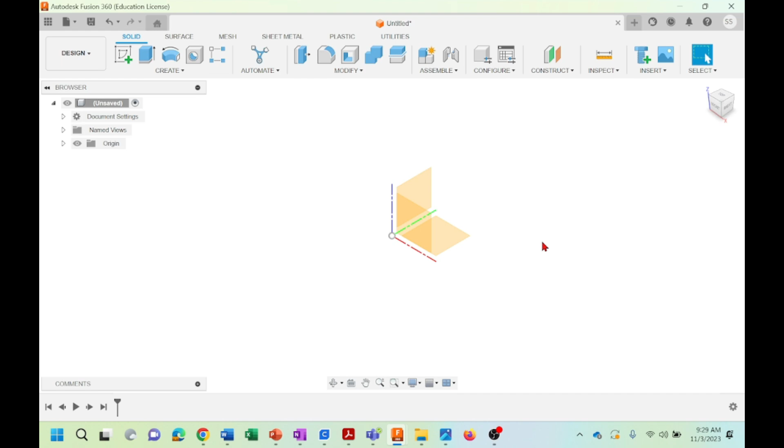So as you could see, we come here, we click on this eye icon to be able to see the origin. So as usual, you go home, and as you can see here, there are three axes. The red is the X, the Z is blue, and the Y is green. So I want to have the sketch in the XY plane. So I click on this plane here, right click and say create sketch.

So now I'm in the XY plane and I could have my two-dimensional sketch here. Before we start to draw anything, there is an important term in Fusion 360 that you need to understand: fully constrained. So what's the meaning of a fully constrained sketch? It means whenever you draw any item, if its size and position are completely defined for the software, we call that sketch or drawing fully constrained.

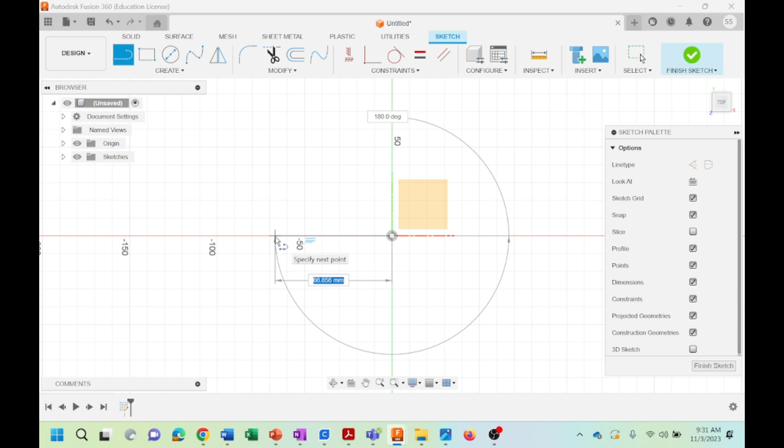So let's have one example and see what that means. Let's come to the XY plane and here you see Create. I select this line; I want to draw a line. So I put one point on the origin and the other one on the x-axis. You could type the length. Let's say 50 and we click that.

So as you could see here, I drew the line, its color is black, and you also see this small lock icon here. That means my drawing is fully constrained, and the software knows exactly what I drew here. As I said, if your drawing is fully constrained, the color should be black and you should also see this lock icon here.

So let's draw another line which is not fully constrained. I click here on the origin, another line, say 95 as the length and press enter. See this line. As you could see, the color is blue, which tells us it's not fully constrained, and also this lock symbol changed to a pencil, which is another sign that says this is not fully constrained.

In Fusion 360, the origin is defined, so whenever you put any dot there or start at that point, the software knows exactly where it is. The same goes for any point that you click on the Y and X axes; the software knows that point. So for this line, I clicked on the origin, which the software knows, and I chose a point on the x-axis, which again the software knows. That's why this is fully constrained.

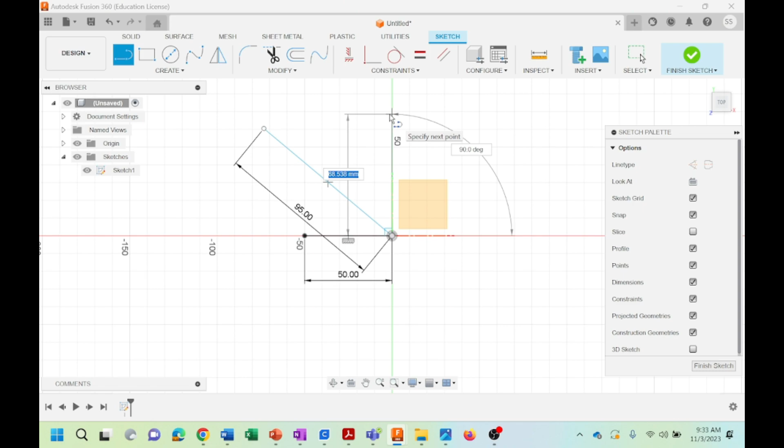So let's have another line. I click here on the origin, the other end should be on the y-axis, and I give 70. I click that. As you could see, it is black, which means it is fully constrained. And because we have this line which is not constrained, there is still this pencil.

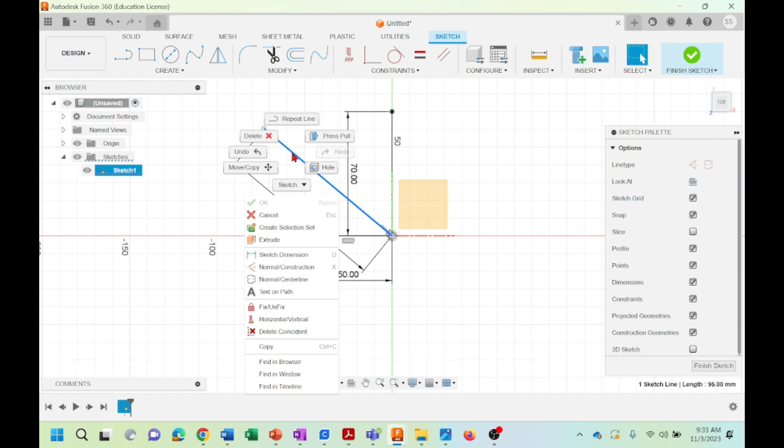If I delete this, just click on it, right click, and it should give you the option to delete. Now I delete it and see my sketch: the lock is back here because I have two lines which are both fully constrained. So that's what you should be careful about whenever you use it.

Whenever you draw a line, you see here you have a sketch palette. The first item has two options for line type. Line type could be construction or centerline. If it's construction, it means this is not a part of your drawing; construction lines just help you make your drawing. If you put it on centerline, it means it's really part of the drawing.

So here, let's change them to construction. So I click on them, just click this. Now see, it is dashed. So it means this is actually the construction line. I'm doing the same for this. Click the line and click on construction. It changed to dashed.

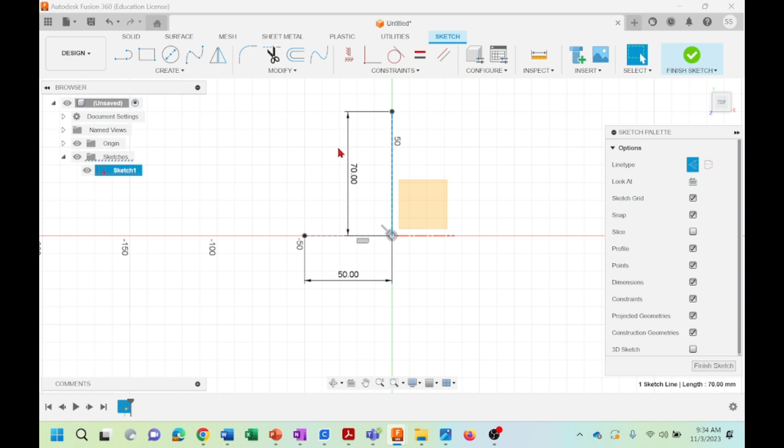So it means these two are not really part of the drawing; it is just a construction line that helps us make our design. So as you see, both of them are now fully constrained. It means the size and also the position are completely defined for the software.

Let's go back to create and start to create a few other drawings. Let's do the rectangle. Okay, so I'm going to say center rectangle. Probably I need to move that a little down. You just push and hold the wheel in your mouse and move your mouse down, so then you can actually move the sketch that you have. So let's do that. Create rectangle, center rectangle.

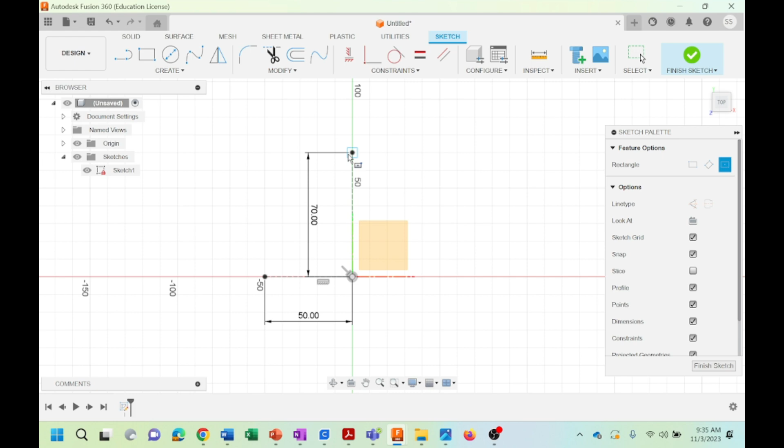I actually put the center here. Then it asks for a height and width. Let's just say 40 for one. Then push tab. 40 for height. Then push enter. So you tell me, is this fully constrained or not? The answer is yes. Why? Because the color of the rectangle is black, and also in the sketch you see the lock here. It means it is fully constrained.

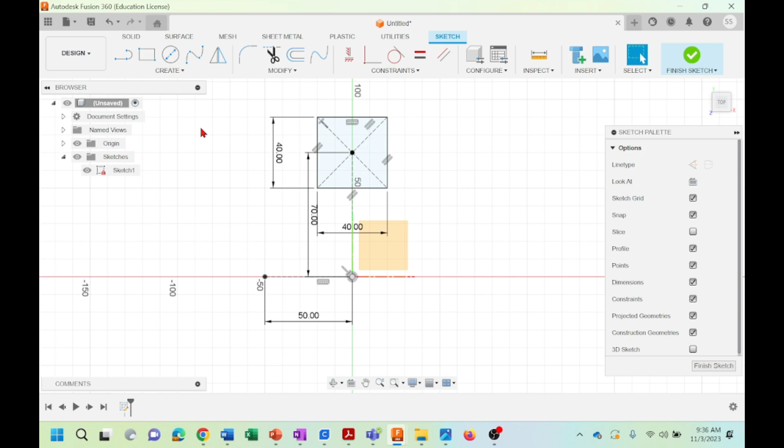Let's actually redo that this time. Go again to the rectangle, the center rectangle, and draw this time here. Same thing, just change the center. Let's say 20, tab, another 20. Then we push enter. So as you can see here, this is blue, which means it's not fully constrained, and here you see the pencil. Why?

The reason is here the center point is already defined by this line, and the software knows exactly where the center is. But here this point is not well defined, and the software doesn't know where this point is. So if I move it, you can easily move it. It means it's not locked, it's not constrained, it is not fully clear. The size is clear, the height and width, but the position is not clear for the software, and you need to fix that.

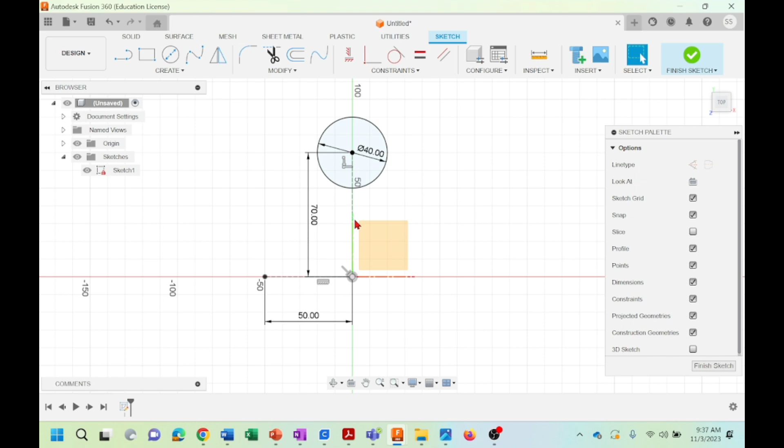So let's undo and have a few more examples. Let's do the circle. Let's start with the center circle. Let's put the center here and let the diameter be 40. So I push enter. It is black, fully constrained, because the position is clear and the diameter is clear, and the software knows where this point is because of this line that you already have.

So now let's redo that and draw it somewhere else. I push here, the center will be here. Let's say 40, tab, another 40. No, we don't need two 40s technically, just one for the diameter, and enter. So as you can see here, it is blue. It tells us it is not fully defined, because the software doesn't know where exactly this point is.

So let's do another example. Create, let's do the 3-point arc. Let's say the arc passes from this point and also this point. So as you see, it turned blue. This turns to the pencil. It tells us it is not fully constrained. The reason is the software knows these points, but it doesn't know this point. There is no line here. Somehow you need to define that.

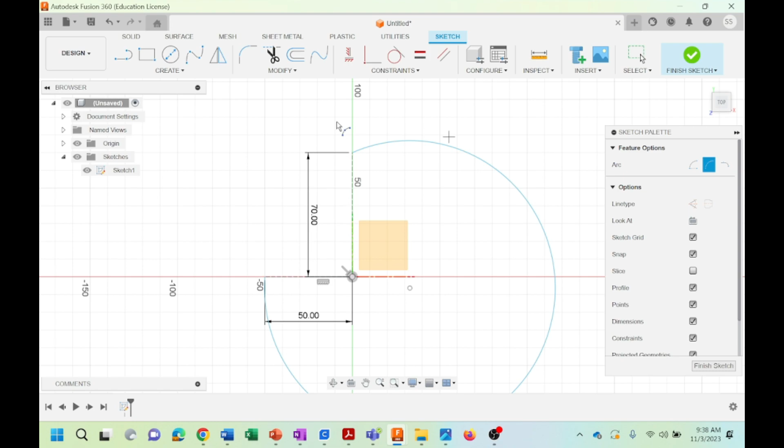Let's do one fully constrained arc. Let me just undo. This time I bring the line from here to here. Let's say maybe 90 for the length of the line, and enter. So the line is fully constrained because it is black. This is locked. Let's make that line type construction, meaning this is not part of my design. This just helps me draw my design.

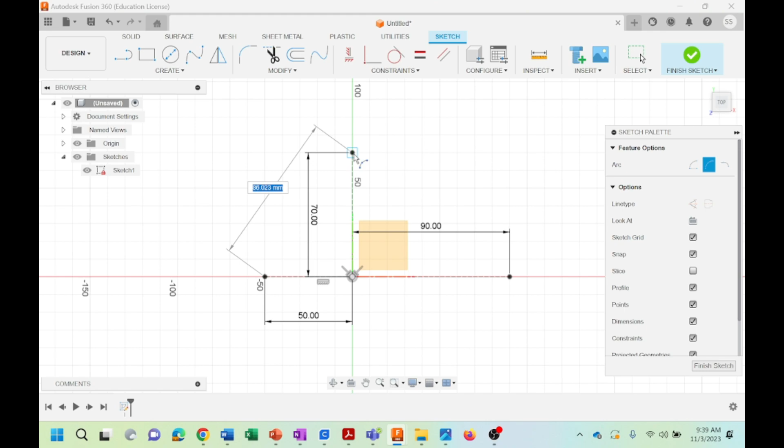So now let's do the same thing. Create, and say 3-point arc. This point, and this point. As you can see right now, it is black. It's fully constrained because the software knows where this point is, where this point is, and where this point is. You see the lock there, which is a good sign.

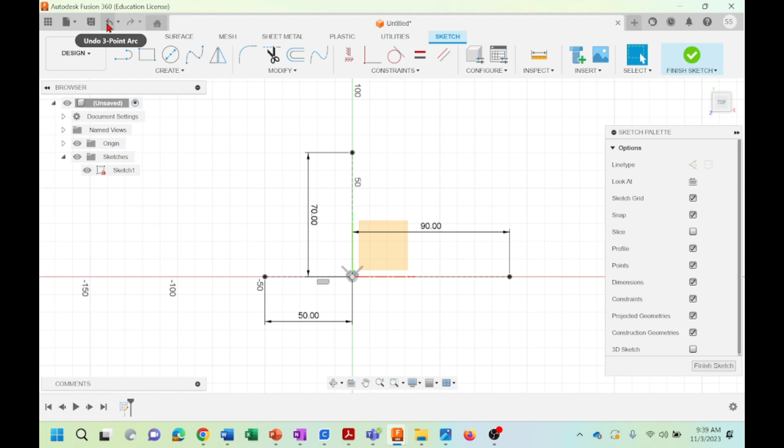It says this design is fully constrained. So that is the other example here. Let's go back and see if we could have any other examples. I don't want to make these videos so long. It's the same concept. You could have the polygon, ellipse, slot, and all the other drawings that you see. You just need to make sure your drawing is fully constrained.

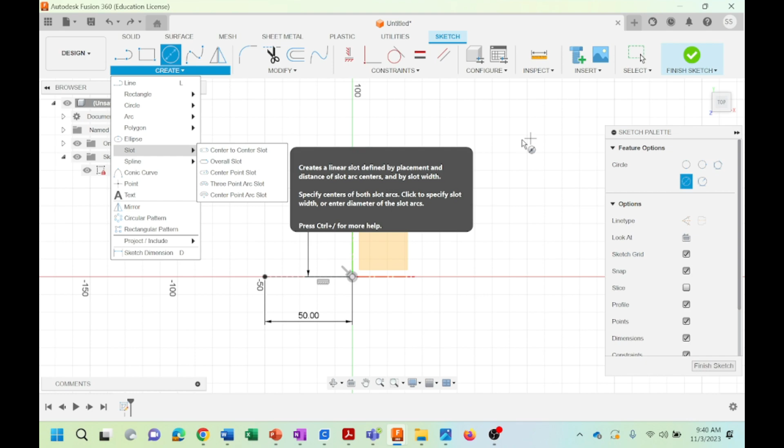In this section, you see we have some icons, which are the constraints. These are very useful items that you could use to make your design fully constrained. In this video, I'm not going to talk about that. I'm going to record another video which explains how you could use these constraint tools to make your design fully constrained. In this video, I just want you to understand the meaning of fully constrained. So let me show you two other useful items that you have here.

The mirror is one of the useful items that you see here. Let me create a circle. I put the origin and say 70 will be the diameter, enter. As you could see, it's fully constrained: the origin is clear, the diameter is clear. Now let me mirror that.

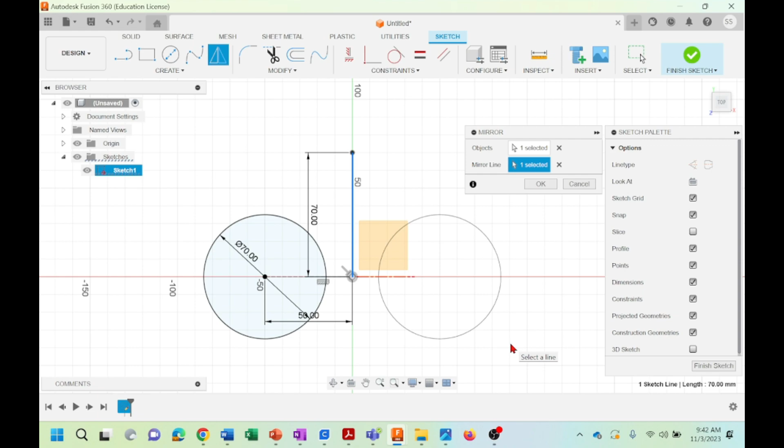If I go to Create and say Mirror, you see this window here. First you need to select your object. I click on the object, 1 selected, then the mirror line. This is my mirror line. I click that. You see it mirrors this circle across the line, which is a very useful feature, especially whenever you want to have a more complex design.

Let me undo that and show one other feature here. Let's again have a small circle here, say 50 diameter, enter. It is fully constrained. You see the lock here. Now let's see how the circular pattern works. I click on circular pattern. It says select object. I select the object, and it says select the center point. I select the center point. Then it says distribution, full distribution, yes. And what's the quantity? I'm going to change the quantity here.

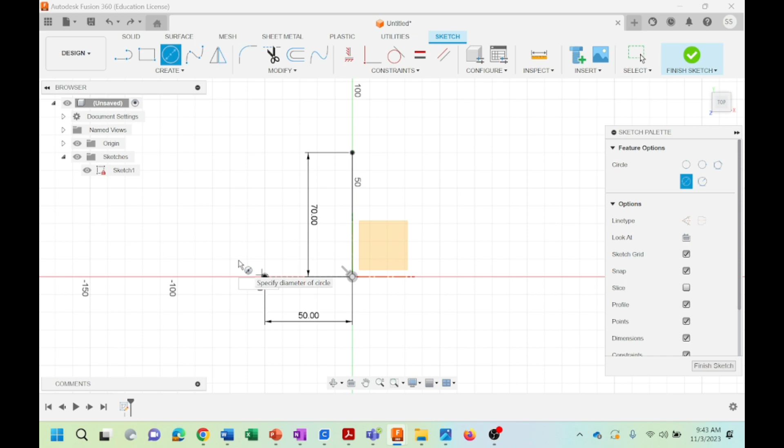I think I did something wrong. Let me go back and redo that. Come here to the circle center diameter. Have a small circle, let's say 40, enter. That's fully constrained. Now let's come to circular pattern. It says select object. I select the object. It says select the center point. I choose the center point here.

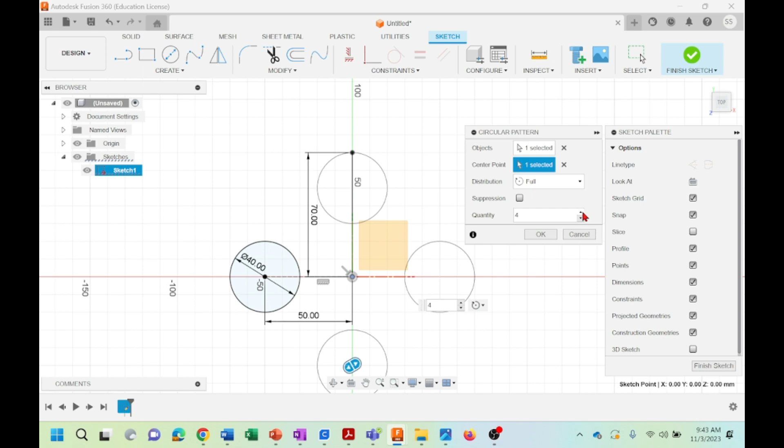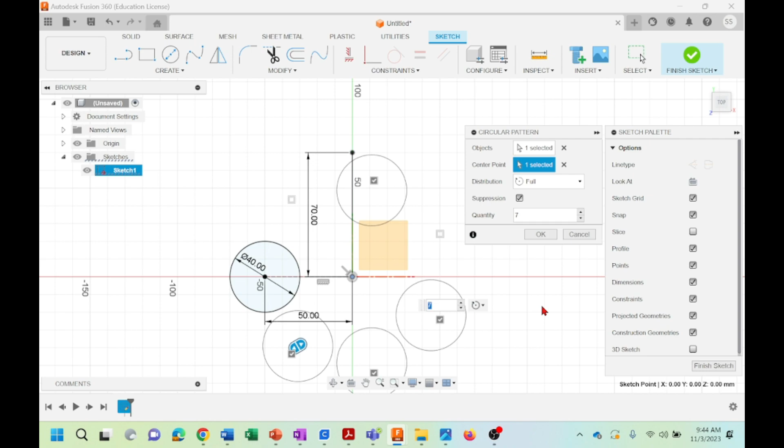Now it's going to distribute that to the quantity that you have: 3, 4, 5, 6, 7, let's say 7. As you could see, it makes the circular pattern. You have the suppression here, a very useful feature. If you click here, you could get rid of some of them. See, I get rid of this, I get rid of this one, and you could keep this. So that is the other useful feature that you could use.

To summarize what we learned in this video: we learned how to have a two-dimensional sketch in Fusion 360. Your drawing should be fully constrained, which means its size and position should be completely defined to the software. What is the sign of a fully constrained sketch? You usually see the lock symbol on the left, and the color of your drawing should be black. If the color is blue, or you see the pencil mark, it means your design is not fully constrained, and the software doesn't understand what exactly you want to design.

In the next video, I'm going to talk about the constraint tools that you see here, which are useful items that help you make your sketch fully constrained.